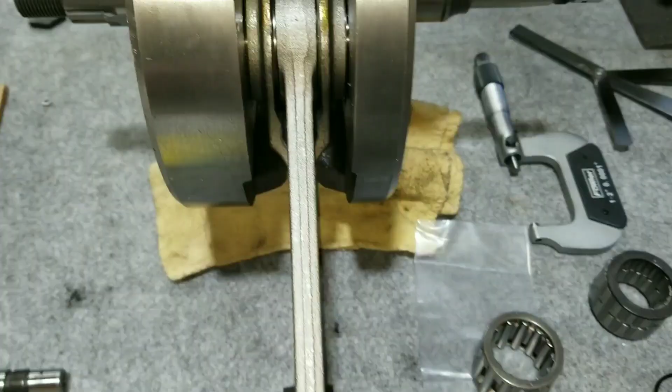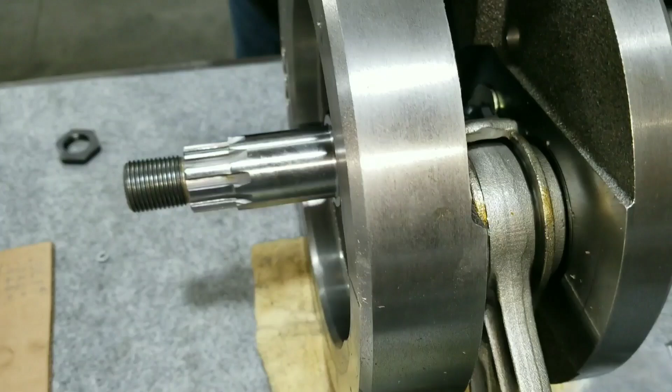Straightforward, this flywheel is a reproduction from V-Twin because I didn't have a flywheel for the 56, and it needed a 58, if you remember right, to make this work with the right side case. So this is a 10-1008 flywheel. It's for 58 to 64 engines, because 65 of course is electric start and stuff. The sprocket shaft changed. This is sprocket shaft side, this is pinion gear side.

Now we fit the bearings earlier into these. We got them to fit really nice. They just went right on and everything in the last video.

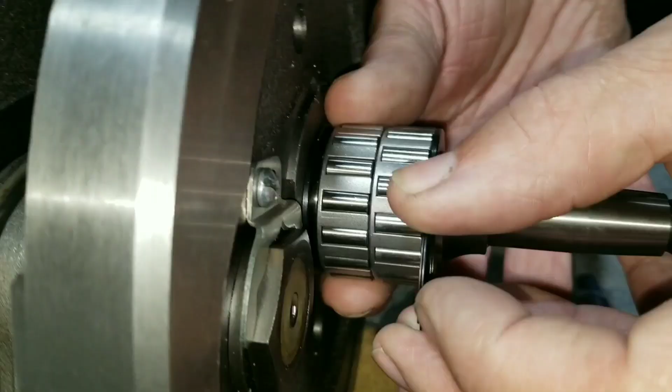But we're coming up with a problem here when we go to mess with the crankshaft, because we used this to fit it with, and this is a good shaft, and this is how you do it. You use one of these extra shafts laying around and fit the bearings, but this isn't attached to a flywheel. So we've got the bearings sitting here on the flywheel, and we come across a problem here with this reproduction: way too much clearance, and it'll fall down into that groove.

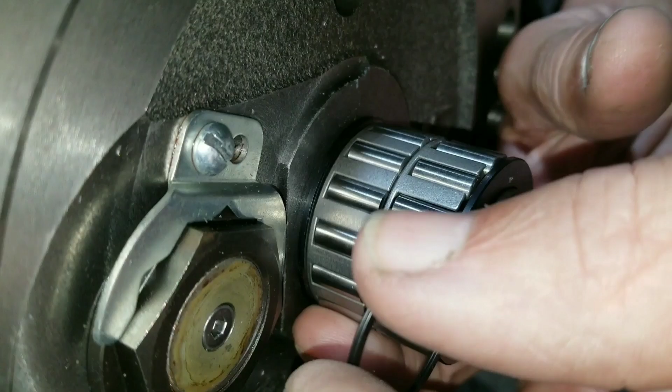See there? Maybe not really. Oh yeah, yep, I've seen you do that. But yeah, what's happening is there's too much clearance, like you said, and then we can't keep this tight with the retaining ring in. Look at that distance between the retaining groove and this. It's almost thick enough for another one of these.

Almost. And there's no special instructions with these flywheels when you get them from V-Twin. And when you go to message them or ask them a question, unless you're an actual dealer in parts, they won't talk to you. So we're kind of trying to figure out what to do here. They don't tell you to use a special bearing with these flywheels or anything, so we got to figure this out.

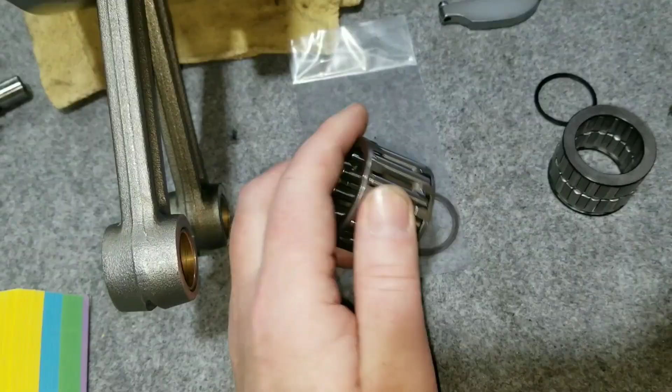And I think we have. What we got here is a different bearing, a V-Twin bearing, and it's a dash 58 bearing, and it talks about how it's for all them too. But didn't it come out like 73 or something? Yeah, something like that, I think this is a 73 bearing. And these changed throughout the years — 73 they changed, 81 they changed.

These bearing sets go all the way to 86, but they changed bearings throughout the years. So using this V-Twin bearing, we slide it on there. We don't put one of these in the back — don't need one. You don't need one in the back, but we put one in the front like we need it, and there it lines right up with our retaining ring groove.

Yeah, and we still have some play. And that's what we need. Now we just recently took this extra shaft and used it with that bearing, and we had the same free play on our right... well, we can't hear because I got a piece of wire in there. But anyways, yeah, that's because that gap ain't there. Right.

So the funny thing about that gap, and we saw this before, because when I got this bike it was all in parts. The motor was, of course. We saw that in the very, very beginning when we talked about this bike. The bike was all torn apart.

It came with flywheels. They had a set of flywheels with it, but we find out they're 80 — yeah, 80-inch flywheels. So they were going to make a stroker out of this motor, the original person. I'll show you them here in a second.

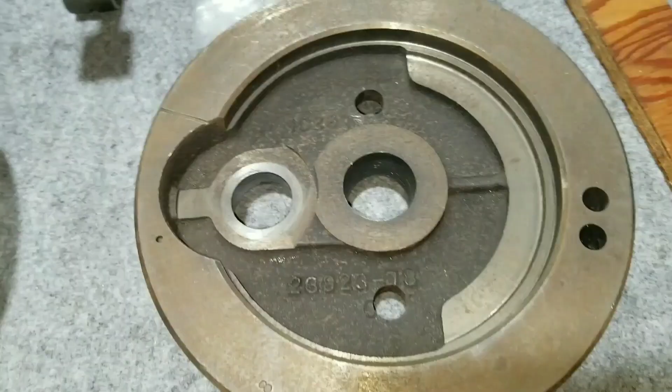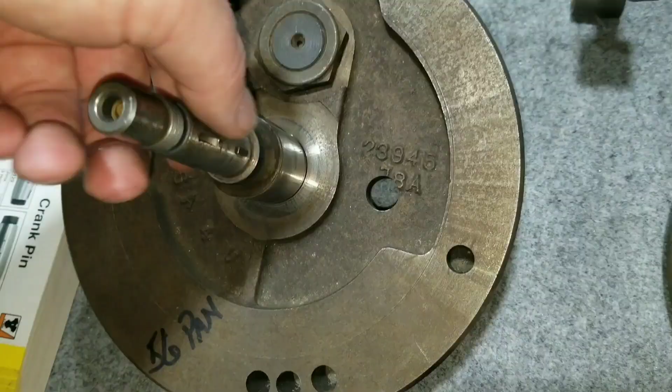So these are the flywheels that came with the engine when I got this bike. And here you can see it has a dash 78. We measured it — it has a 4, and it comes out to this distance here, ending up making it a 4 1/4 stroke. So this would be the 80-inch flywheels, which would have been neat to have an 80-inch pan head. But then here's that shaft — this shaft goes all the way to 74 and so on. But you know what's interesting is that this has that gap too.

So it takes a special bearing. Well, we found out what the special bearing is, and it happens to be this one, but no one ever says anything anywhere. That's the same way.

And even the parts book still shows these all the way through the '74. They show this style bearing using two of those thrust washers and then the retaining ring. So I'm not here to tell you how to fix it, but I'm telling you how we're going to fix our situation to make ours work.

Going forward here, we're going to install this bearing and run it that way. But first off, we've got to press in the Timken bearing on this side and spacer.

I think I covered most of that. Maybe I'll mention something else here if I think of it. Yeah, it's a little bit more here on this flywheel assembly from V-Twin. It does have an S mark on it, meaning Sifton. But in the old days, Sifton didn't really make a bunch of these parts, so it's kind of a well-known name on this. But the other thing I noticed about it was it has the -74 rods,

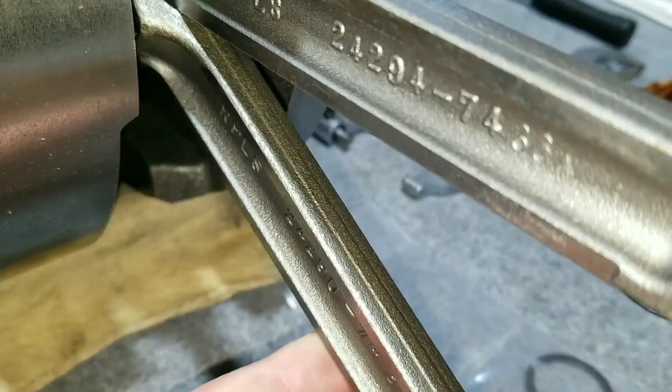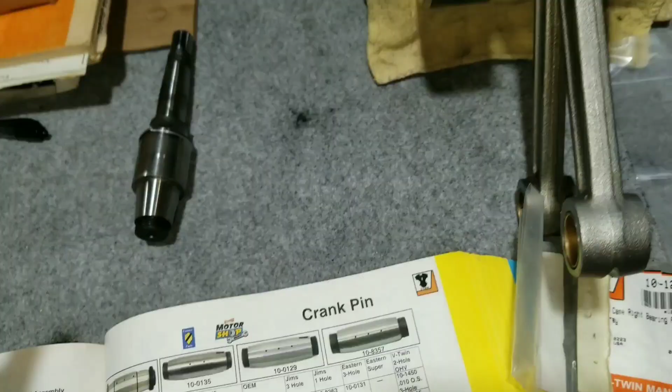which in the V-Twin book, it does talk about how that part number comes out to be 74-inch pans, 74 and 80. It's the same length. It's just that you're moving the pin out farther and back. You're not getting your stroke out of the longer rod. That's what I'm trying to say.

And anyway, the other part is this special bearing, which doesn't talk about needing to use this with the flywheel when you buy it or anything. It doesn't say you can't use original style bearings, because we can, because I showed you that.

But the bearing for this here is 10-1274, and it should end up just like that. So if you're having problems with having that gap like we're having, go that route, and that'll be the way to do it. Don't do anything crazy like leave it out or leave it like that, because it'll flop back and forth, and then this thing will fall inside there. It won't sit true and straight, and then you have a problem.

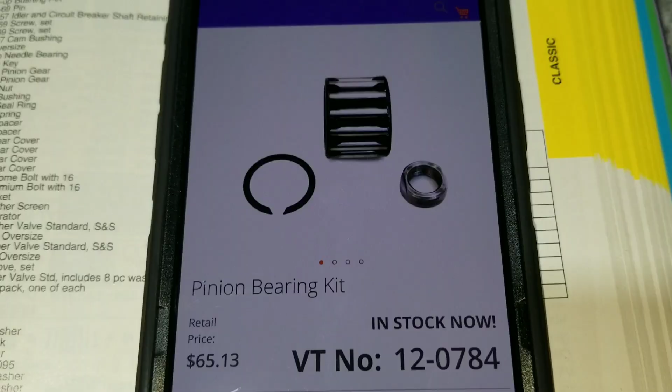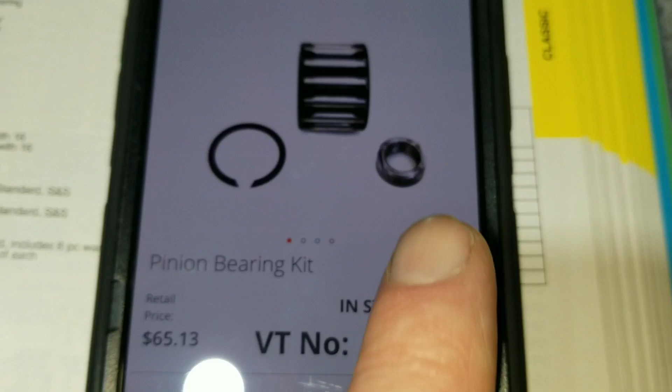So just to clarify on this bearing that we're going with, I just want to mention that this is the part number I ordered, 12-0784. Bearing kit. It comes with the retaining ring and then a new nut on the end. I didn't really need a new nut, but it was kind of a nice way to get that set.

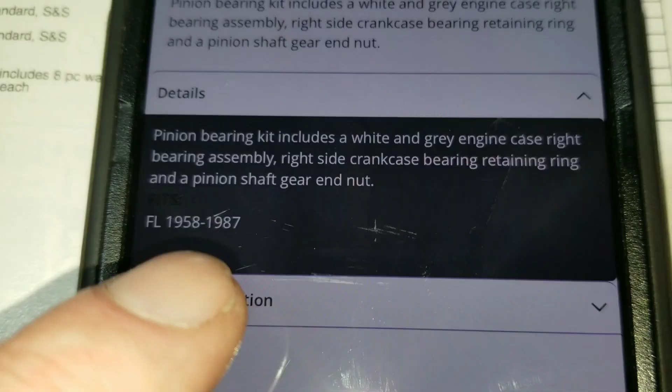But when I opened the package up when I got it, this was what the bearing was sitting inside of. So in the description for this, it says '58 to '87, and of course this is the '87 and later bearing, like it says here. But it is able to interchange.

So, I mean, it's just kind of crazy. I just want to clarify that a little bit more, because I rattled off this part number, which you can just directly go right to this and get it and avoid these other parts here. So, yeah, you can avoid these other parts just by getting that, and you can do that by just going with this number.

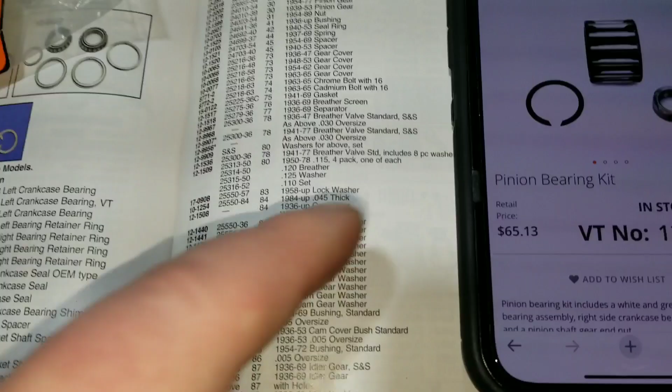But the number for the kit is this one here. It comes with that bearing. And you can probably find it in this book too, but on their website, because this is their website, V-Twin's website. Just gotta find a dealer that sells this stuff. So hopefully that clears that up just a little bit more.

So on this V-Twin flywheel, it kind of irritates me about the whole thing, and probably other people have run into the same problem that I'm running into. It's obvious, because they're probably all like this. But that gap, I was thinking that there was totally a problem with this flywheel, and if V-Twin would have just come out and said, hey, you've got to use this bearing assembly with this flywheel, that would've been okay. I mean, it would help out a lot of people.

And because when you get a '58 replica flywheel like it states, you'd think that you could use all your '58 stuff for it. So I ended up buying those cages and all those bearings for kind of no reason, because all I needed was this. And when we go to check this, like I was saying, it does fit in the right side case, same clearance and everything. In fact, it might even be spot on to the same. I mean, it looks crazy because it's different.

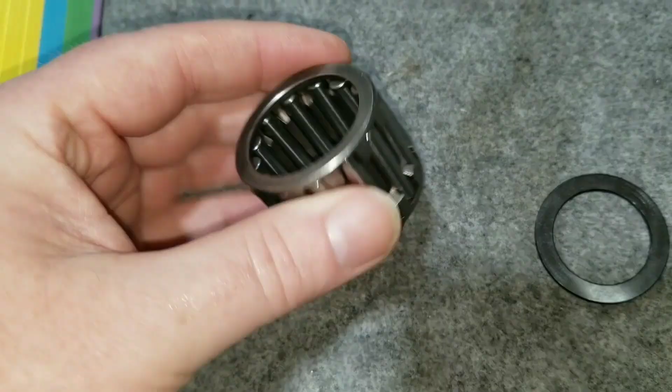The benefit, maybe from this, they went to this style in 1987. But you put an '87 part in a '58 part together, it just doesn't quite logically make sense, because the fact is they're two different eras of time, have different engines. I mean, '87 was the start of the Evolution engine, but yet it still carried on.

And when we were putting that right case or race in, the right side race in, it goes all the way up to '86 anyway. So I mean, it's kind of funny how that works out.

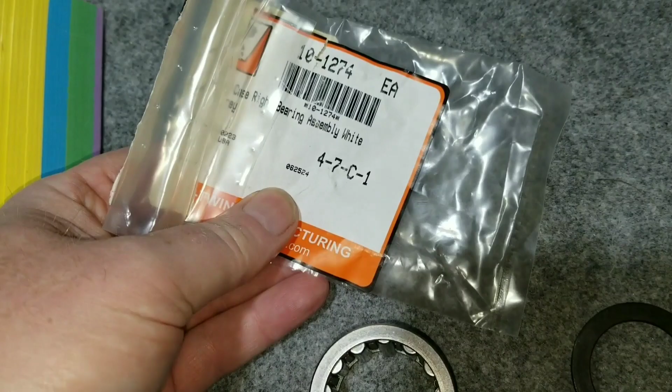Looking back at this, this is the V-twin part number, 10-1274, and when you flip it over, it's got the Eastern information on it. It's made by Eastern, just reallocated by these guys. It says new style, one piece, white and gray, big twin, 87 and present, 24625-80 or 626-87A.

It ain't gonna be a big deal running this bearing in there. Like I said, it's got a full length roller, going across the whole section instead of having all these different rollers. Other than that, you've got your thrust washer spacer. No big deal, I'd have to actually look at an 87 book and an 87 to 99 book to see what that looks like. I have a parts book for a Softail over here, maybe I'll look at that real quick and see what it looks like in the print.

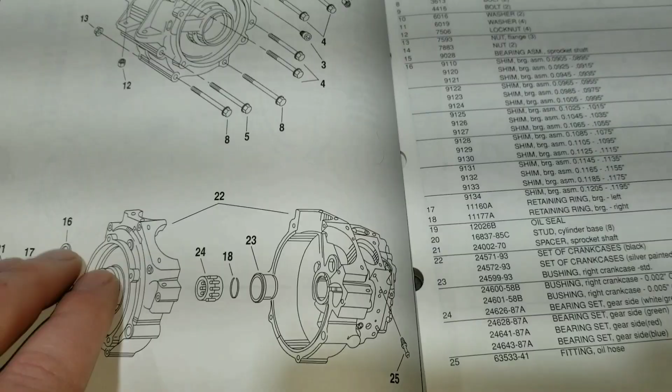Alright, this is a 99 Softail book, Evolution engine, and there's our bearing, our race, and then the keeper. It doesn't show that spacer, which we're going to need for the 58 flywheel. Over here we've got 24, 18, and 23. Okay, so 24, there it is.

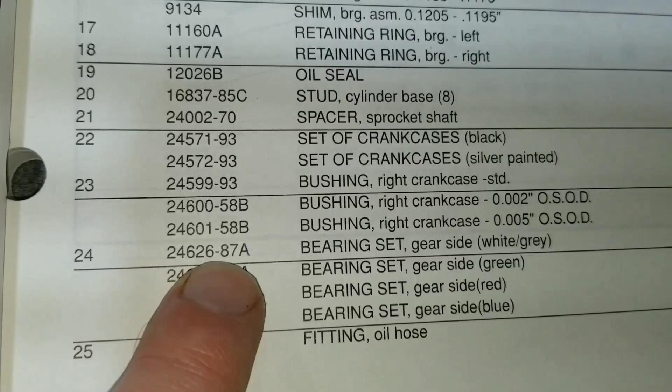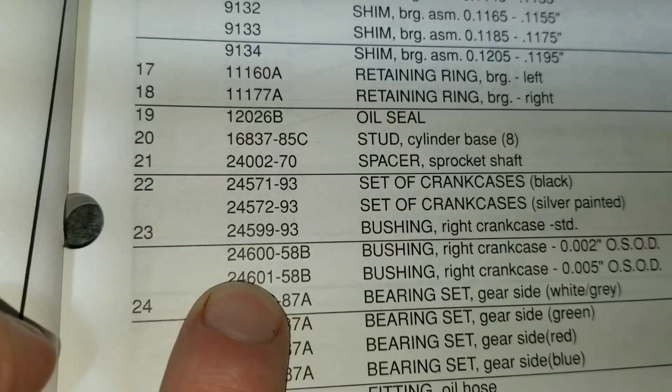24626-87A, white and gray, meaning standard, and then it goes to oversized in different colors. 23, there's the race we put in, 24600-58B, I believe that was what it was. No, that was the oversized one. Okay, so that's the oversized one, and I guess they changed it to the standard one being a -93 here. So we put the 58B, but it was a different part number in the front there in the case. It was a standard size one. And then of course the snap ring, or the retaining ring.

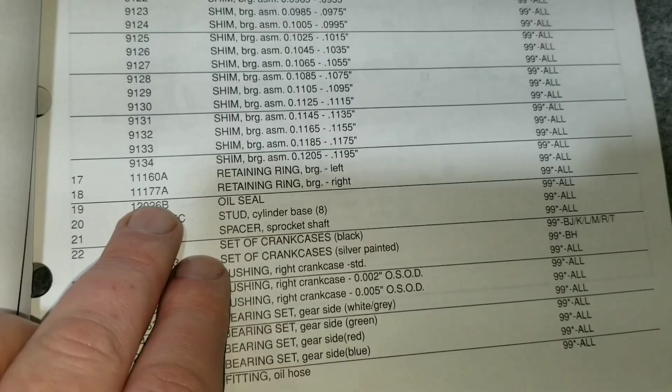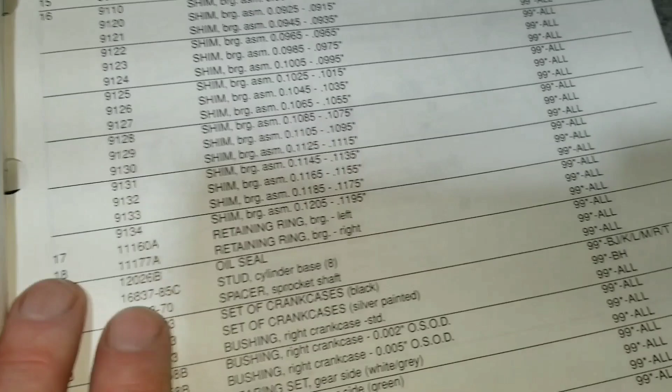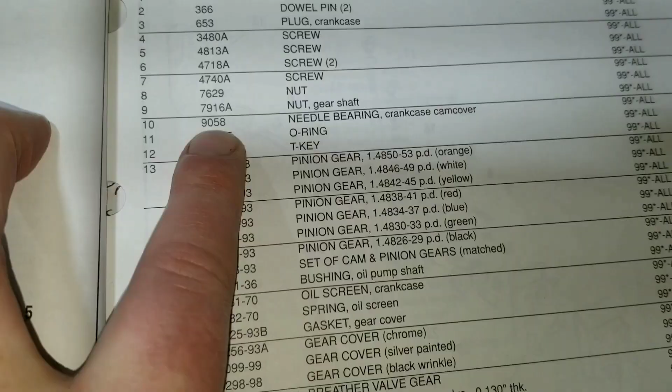But there's still a lot of similarities going on here in this engine compared to the panhead that we're working on. Like the left side bearing here, it's real similar. It's a 90-28 though, they changed it a little bit from 65 on and so on. Cam side, they got this bearing here, it's the 90-58, which starts in 58 and goes all the way to 99 here. It's kind of cool how these parts lasted as long as they did. They worked good, so they left them.

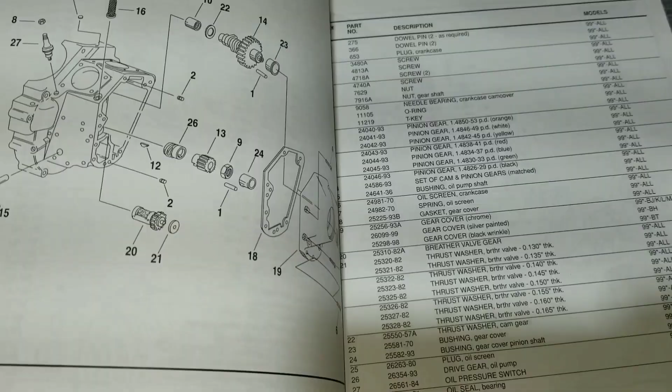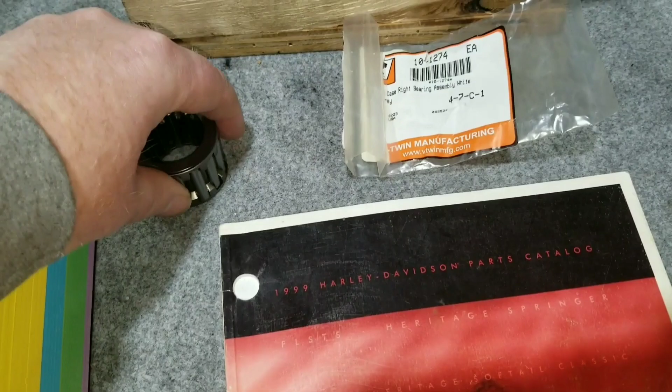And then in 2000, of course, it changed for the Softails anyway, when it went to the twin cam. 99 got the twin cam, and all the Dyna models and the FLHs. But anyways, that's a whole different story and ball game. So just trying to clear up some stuff here on the 58. Hopefully it all makes sense, and then we're just gonna go ahead and keep moving forward here on getting this flywheel going.

Before we flip it over and start working on the left side, I want to pay attention to this right here. A lot of these gear side pinions have a hole here for the oil travel gallery, and we want to make sure we install the set screw that belongs in there. We need to not just leave it like it came from the factory, we need to actually use Loctite and seal it tight, because you do not want this to leak. If this leaks, you'll have no oil pressure, because the oil's coming through here and out this hole. If it goes out that hole too, it just dumps into the cam cover. So we're gonna install that now.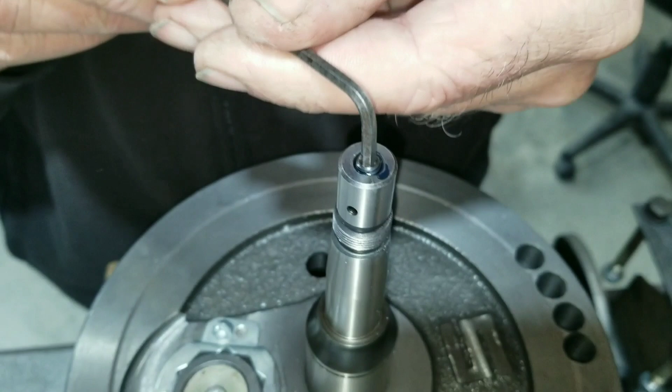Here's some blue Loctite. Put it in as tight as we can get it, because it will stop before it gets to this hole here. We brake cleaned it first.

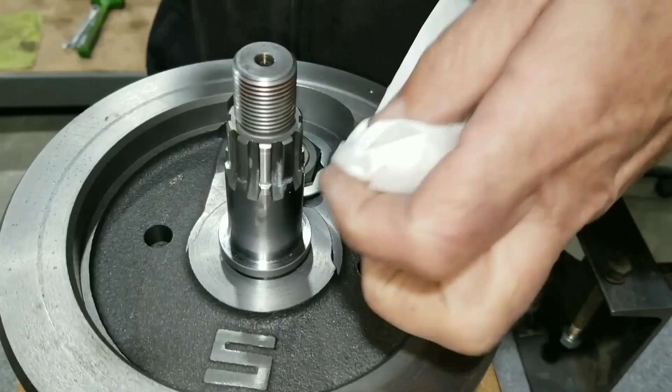Now we're ready to move on to the left side. Alright, so we got this flipped over and we have it on the left side now, up, ready to start working on installing the bearing here.

We did have this thing checked for trueness on a truing stand, and it comes out pretty good. This ended up having a little bit under 1/1000th, and the other side is 0.5, so it's really true - really parallel. It's really close. This part to here, the runout is good, and then of course the two halves are good, and the other side.

We had that done, not really locally, but at a well-known place - local, close to us anyway. So anyways, we're gonna move on to installing the bearing now, because now we know for sure that this new product is good to go and should not have a problem when we get to the end here on runout. Assembly runout, that's what we're looking for.

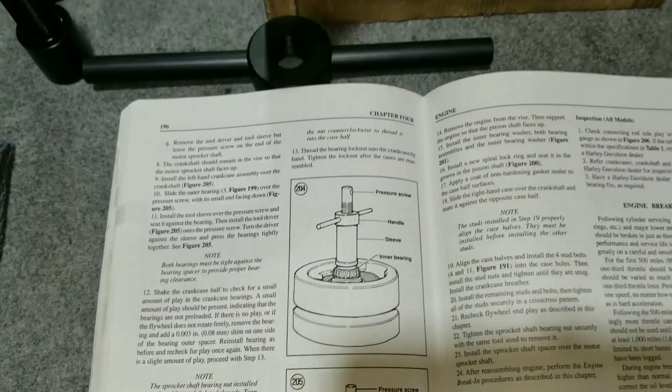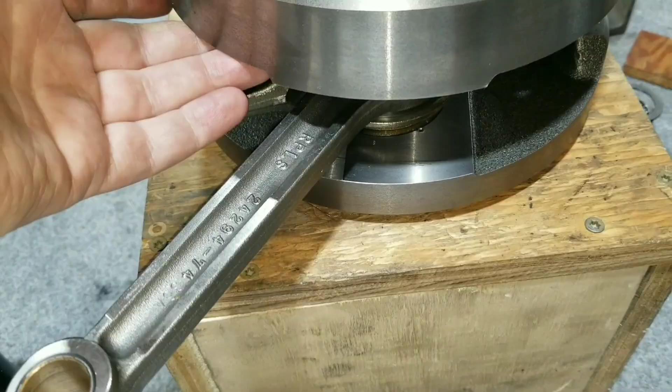Here we go. We're gonna get ready to install the bearing into the left side of the flywheel, and we got it sitting up here on our box. We need a special tool to do this because we don't want to damage or mess with the truing of this, because if we bang it on there or press it on there, the flywheel will move, and then the truing won't be proper anymore.

This is a balanced flywheel. I don't know if I talked about that yet, but you can see it has dynamic balancing holes in it. They had to spin it, must have had it with weight, so it has some sort of balance to it. Anyways, here's the tool to install it.

We got the handle. We have this part we got to thread onto the sprocket shaft first, and then we slide the bearing down across it, and then we use this to press the bearing down in. We got two different ones that came with this, depending on how close we get, how much distance we need. We got this nice manual here that talks about the entire procedure, so we're going to kind of go over it without reading it word for word.

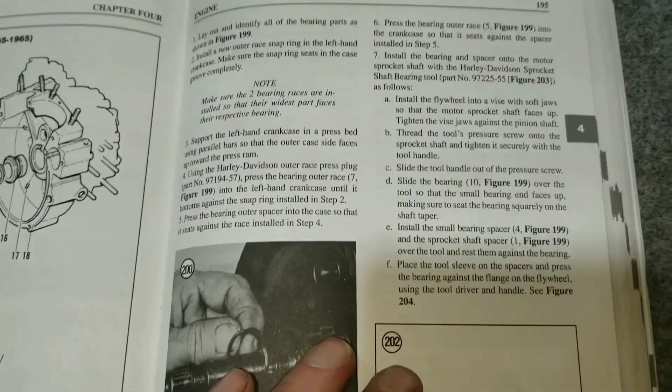Starting off, it talks about how we got to install this onto the sprocket shaft, and we have to tighten it onto there. I can't find my little rod that goes inside here, but this big Phillips screwdriver slides right in there, nice and nice.

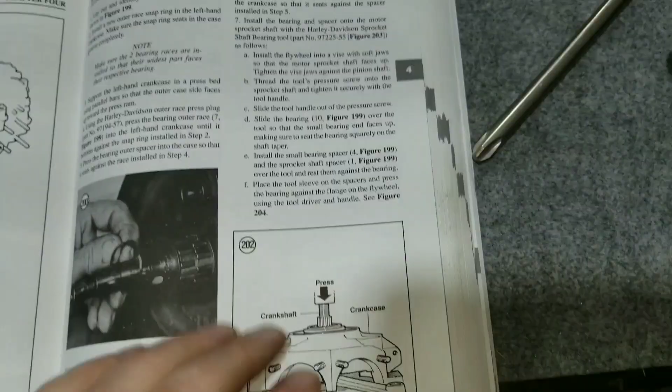Alright, so then it talks about once you do that, slide the bearing over the tool so that the small bearing end faces up, of course, like this, small end up. Wow, just fits. Yeah, it just does. And then I started off all crooked, so then yeah.

Then we slide our special tool down. Okay, put this on it. We could probably... it doesn't talk about that spacer yet. Oh yeah, install this small bearing spacer. And then put that - yeah, so you don't hurt the cage. Oh yeah, the bearing, and then our sleeves.

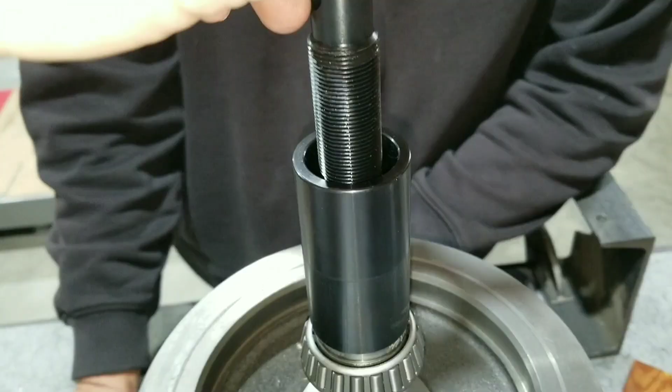And then you either want to put that in there to make the difference, or you just use this and thread it all the way down. Oh, we're going to have to, because there's no threads there. Alright, we're going to get that going, and check out some more steps here.

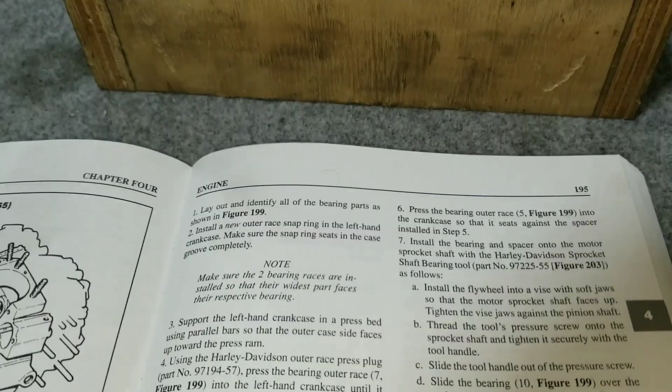Okay, so in the instructions here it says to install the small bearing spacer, number 4, which is that one there, goes between the two Timken tapered roller bearings. Then after that it says the sprocket shaft spacer, number 1, which is the one that goes against this inside this seal here. So we have both of them in there right now.

The bearing is starting to go down. This is starting to engage the taper, and this one's sitting right above it. So we got a long ways to go. We'll get to the point of having this all the way down, cranking on this the entire time, and we'll come back.

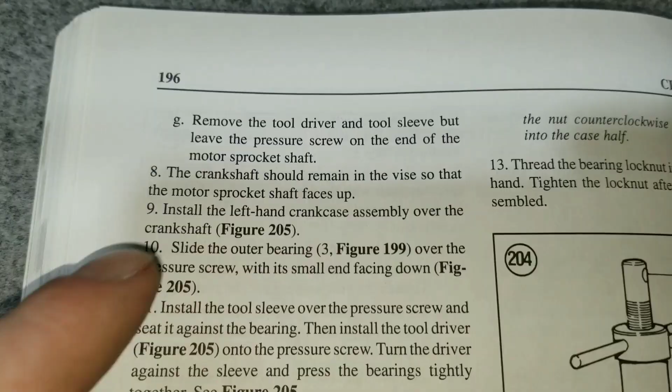Alright, we got it all the way down, and the bearing still moves and stuff, that's great. And then it talks about leaving the flywheel in the vise with soft jaws - this worked out really well, you were able to hold this still while cranking it down. So anyways, it says leave it in the vise.

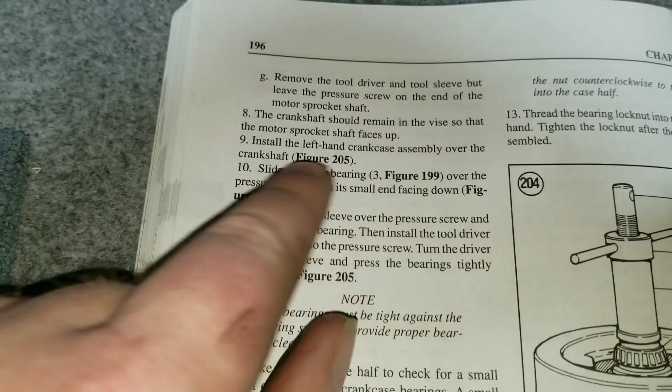Install a left-hand crankcase assembly over the crankshaft and slide the outer bearing, number 3, Figure 199, over the pressure screw with its small end facing down. So we're going to be putting this bearing in next, and so on.

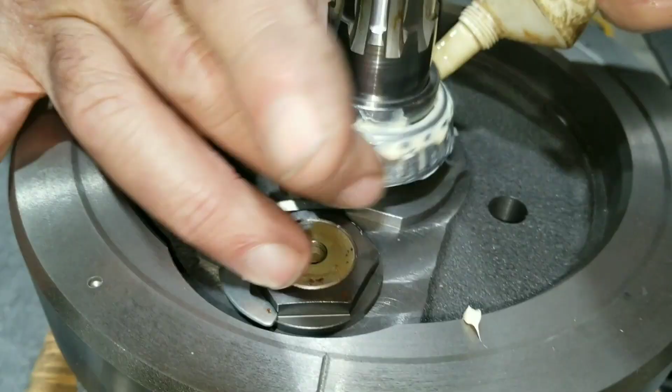This all dissolves in oil. Yeah, but we want something in there before we want to be back in there, so yeah, we want something there for a pre-lube. Where's the other bearing? It's right here.

Okay, put that back in there. Install the left hand crankcase assembly over the crankshaft.

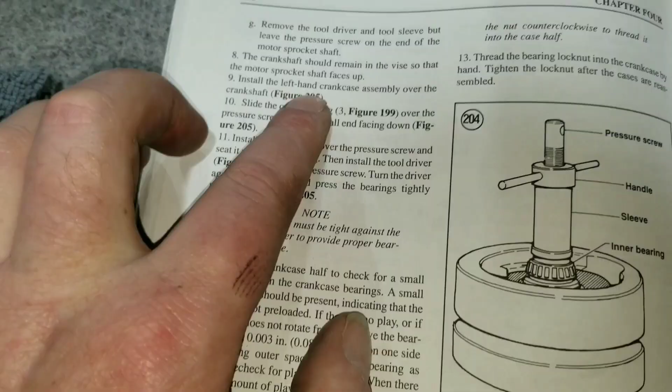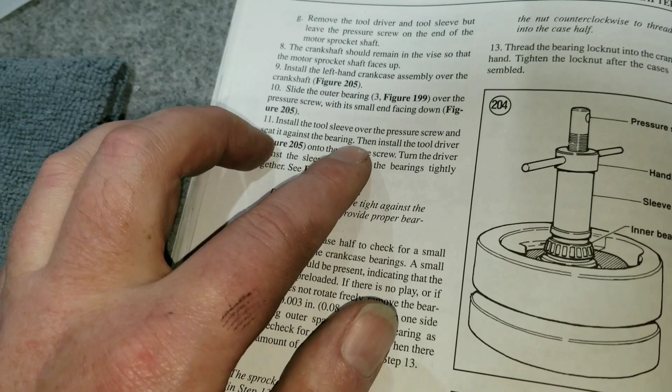Slide the outer bearing over the pressure screw with its small end facing down. Install the tool sleeve over the pressure screw and seat it against the bearing. Then install the tool driver onto the pressure screw and turn the driver against the sleeve and press the bearings tightly together, just like this.

Okay, let's go. Alright, so we got the spacer in between the two bearings. Now we got to get this square. Put that square, and then we're going to start our process here.

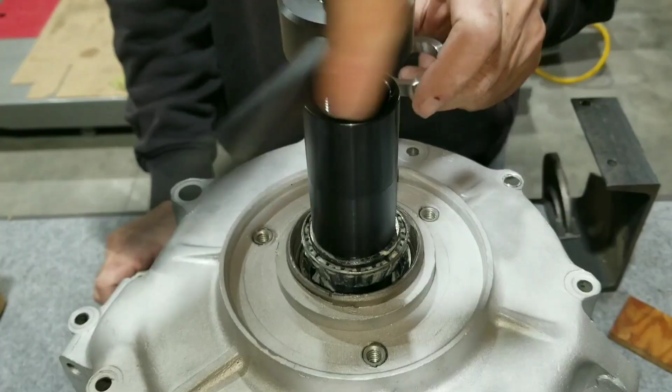Yeah, I think you're supposed to put this on there too, aren't you? Oh yeah, so it doesn't damage the bearing when we go to press it in.

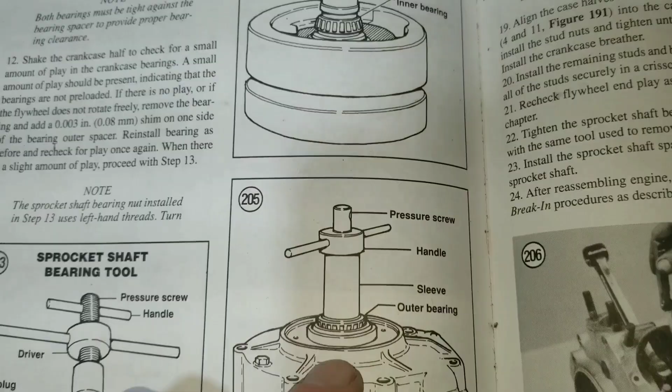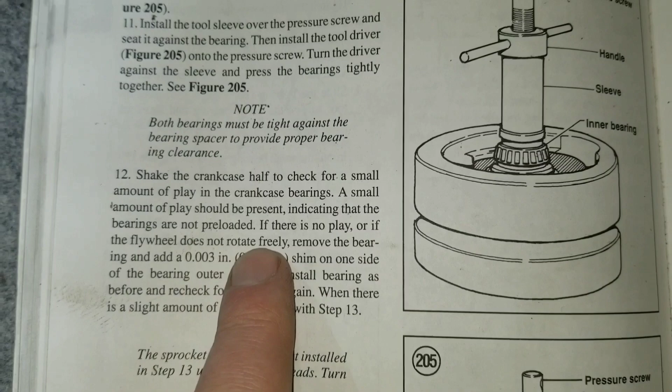Alright, we just got the left crankcase assembled here, and we got the bearing pressed in with our special tool. It says here in section 12: shake the crankcase half to check for a small amount of end play, or play in the crankcase bearings. A small amount of play should be present, indicating that the bearings are not preloaded. If there is no play, or if the flywheel does not rotate freely, remove the bearing and start over by putting a 003 shim in.

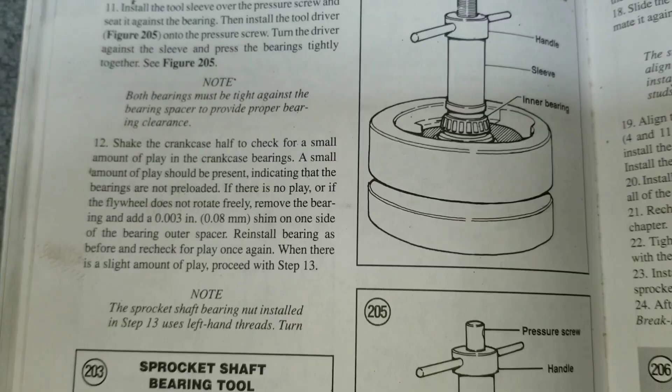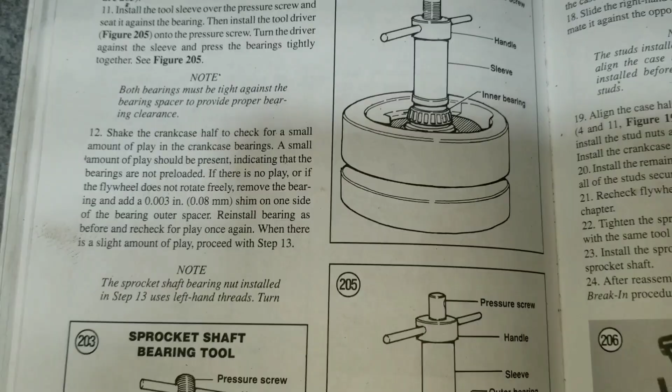Well, this special Timken bearing set is actually a precision machine set from Timken, and it has all that stuff figured into it. So the spacer that goes between the two tapered roller bearings, it's all figured out. You usually don't have to worry about putting this in unless you have some wear or something. And anyways, because you want the tapered roller bearing to be on its race very nice and straight.

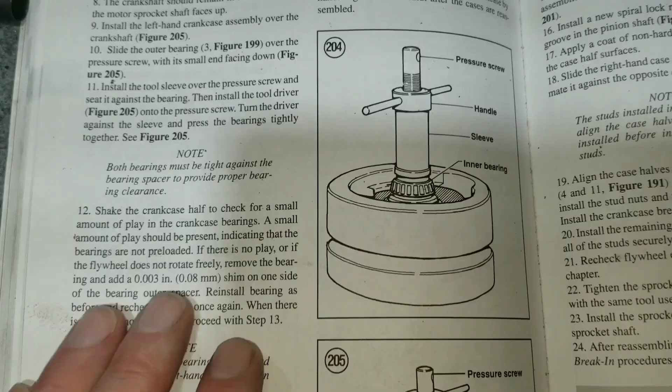You don't want any sort of slop. So if it rotates, then you know you have clearance. If it doesn't rotate, you have bind. And this will open up when it gets warm anyway. Things will grow. So just want to talk about that.

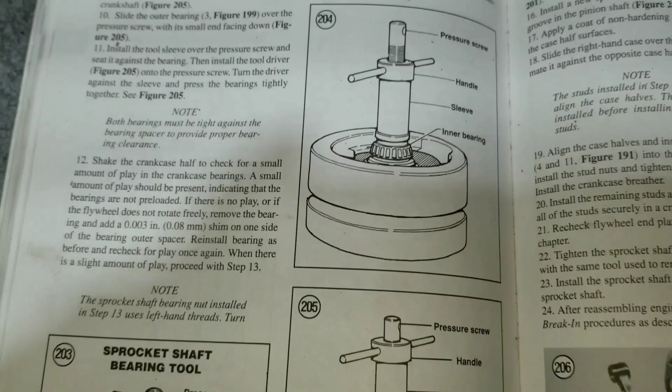So we have good rotation, and we're ready to go on to some more stuff here with getting it all together. We're ready to install this retaining seal here.

It has a lip. We have it oiled already, so it's gonna be nice and fresh oil going there on that seal. There's a special tool to install this too.

It takes something like this. This is made by Colony. It's kind of nice. It's backwards threads. Yeah, I think that's what it was, left. Then this works with both aftermarket and standard factory retainers. 2318-1 special tool.

There it is. All right, we'll check all this stuff later, as when we do have the engine halves brought together, which is coming up next. I think we'll be able to do that now.

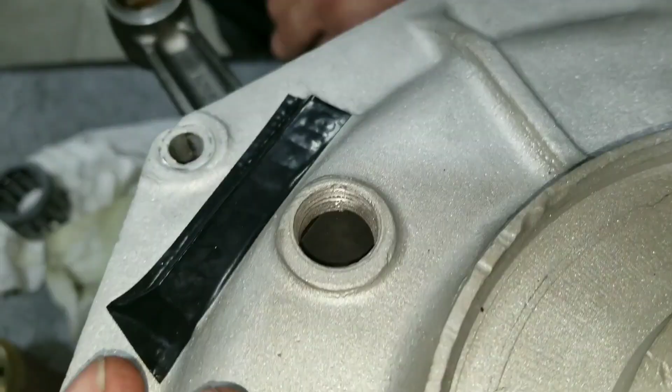There we are. This part of the case is all assembled and ready to go together now, and we did check to see if we have timing marks and stuff, and they're in there somewhere. Yeah, there's one. And there's the other one. That's the one for the timing light.

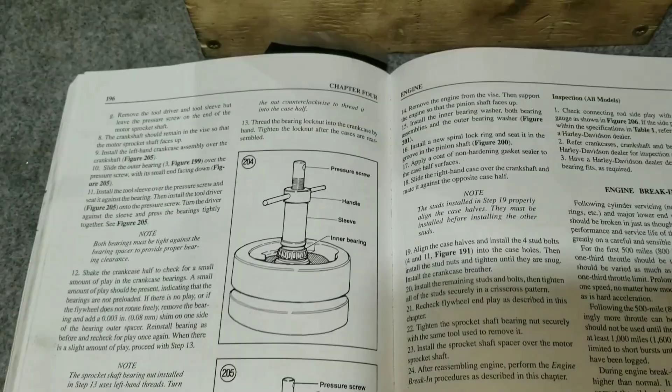So now we're ready to flip it over and install the right side. All right, so going on forward from here, we just got done pressing the bearing down and stuff, and we got the left case on there and all tightened down.

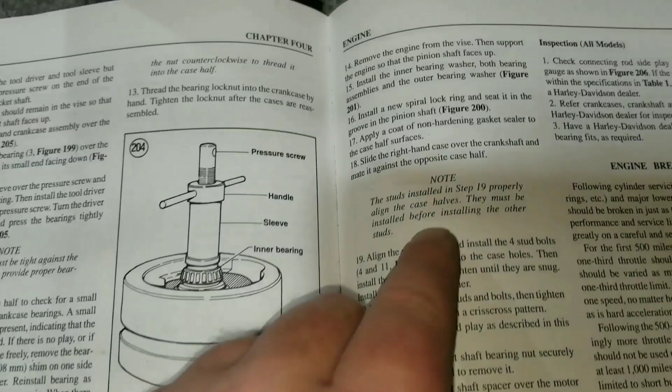Going on with the steps here, we have: remove the engine from the vise, then support the engine so that the pinion shaft faces up, and we're ready to do that. Install the inner bearing washer, both bearing assemblies, and then we're ready to put all the right side stuff in and put the other half on.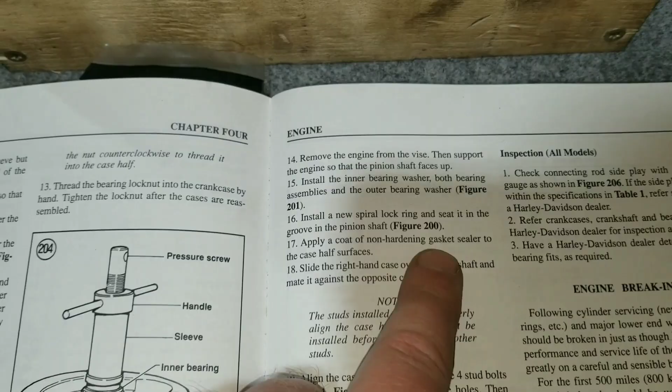It then goes on: install the new lock ring, which we're doing anyway, and then apply a coat of non-hardening gasket sealer. We're not going to do that yet because we might have to take this apart again when we work on the right side.

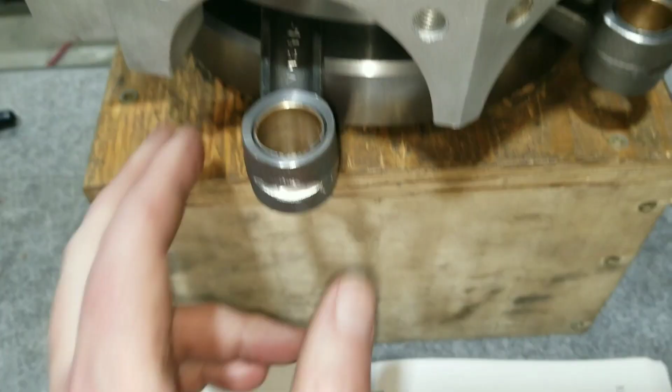We're going to end up having to maybe, this is the new flywheel like we talked about, and the cam cover is a used one, of course, and the bushing may need to be replaced. So we'll find that out in the next, maybe the next video, because we won't get that far here. So let's go ahead and flip it over and then get the right hand side all together.

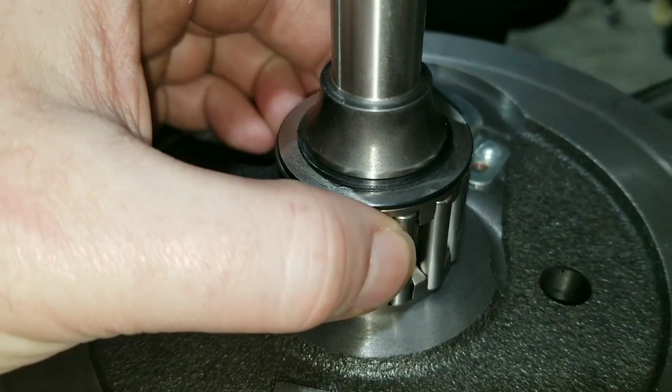All right, so we have the bearing installed here. We talked about this earlier. This is the style bearing we're going with. We have the thrust washer there, and then the snap ring installed there. And there's good free play there, enough to be right in spec, and it doesn't wiggle and wobble around.

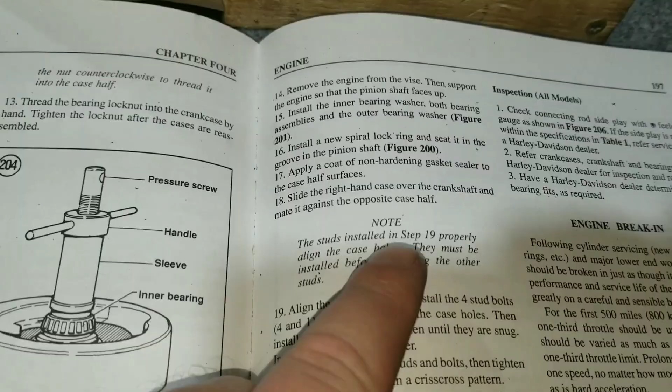And then the next part here, there's a note. It talks about alignment studs. The studs installed in step 19 properly align the case halves. They must be installed before installing the other studs. We talked about this before, alignment studs, but we're going to put some emphasis on it.

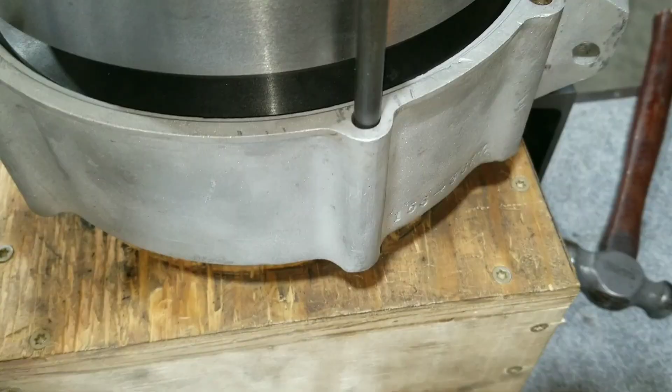So an actual alignment stud is a stud that goes in these bottom two ones here, and it goes in kind of tight, like so. A non-alignment stud would be like this one here, and it has a lot of free play. So to have the case halves properly aligned, we need to install these three first, and then the top one.

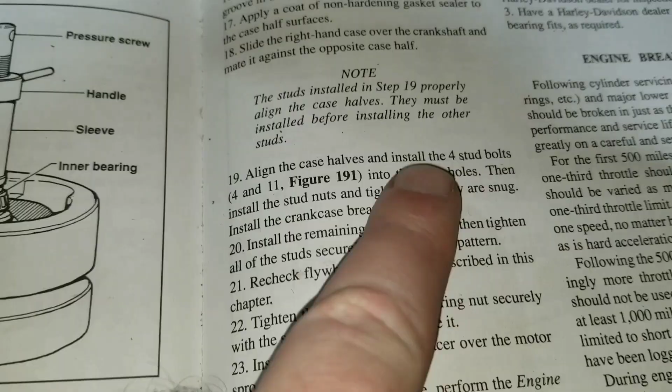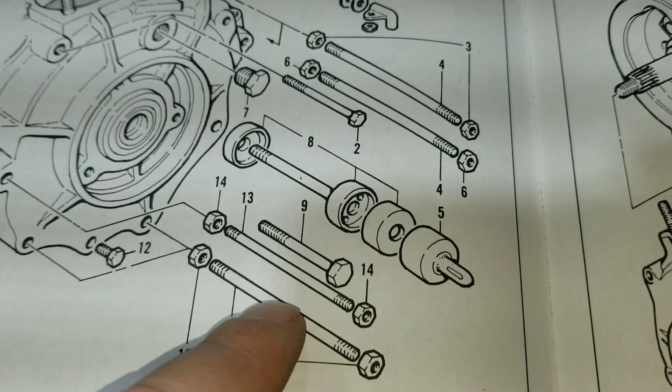And then there's actually another one in this picture here. It talks about the four stud bolts, 4 and 11. So here's the picture. Number 4, we got one going to the top center. And then we have these two going into here and then over to here. So these are alignment studs. They're number 11 there, through here, and then over to there.

So then we get those in, and then we can go from there putting the rest of the studs in. So we're going to do that real quick here. We got the two crankcase halves together here, and we're going to show before we put all the

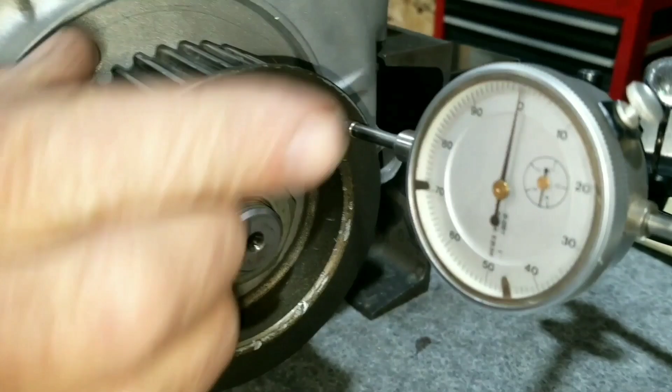other case hardware in, we're going to show you the end play we have here. So you got to make sure that end play is the left and right movement of the crank, the free play. Right now I got it zeroed out. It's all the way back. We got 1.5 thousandths. That's really good.

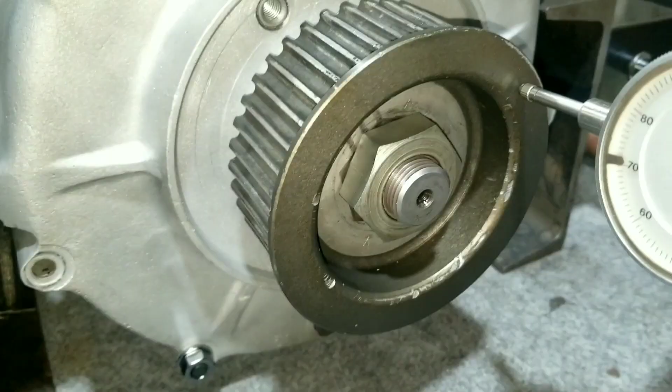All right, let's get finishing up putting all the hardware back in. We got the bottom end here sitting in our stand, and we have all the case bolts all tightened up, and they're even. The studs are well centered in the nuts here. Here's the 57 and older style crankcase breather.

Now, we didn't put the 58 one on. I know this is a 58 later right case, and we should probably use the 58 one, but we want to use this because we're going to be running a belt drive primary, and we want to hook a hose onto this and put a breather or something on there. We don't want the other one, because it looks like a big round circle and you can't do anything with it, and you'd get oil all over the place. So that's why we're doing it this way.

I guess this kind of comes in on this video, getting the crank flywheel assembly into the halves. And I hope you enjoyed everything. The next video we got coming up for this one, we'll continue working on this, and we will put all the gears in the other side and load all this up. The gear chest there, we'll load that up. It depends on how far we get, but building this motor is going to take a little while. So I don't want to have these videos super long, but we're looking pretty good here.

Okay, so finishing up here with this, I just want to show the nice smooth spin of this. And you can see that it's nice and quiet, and it's rotating nice.

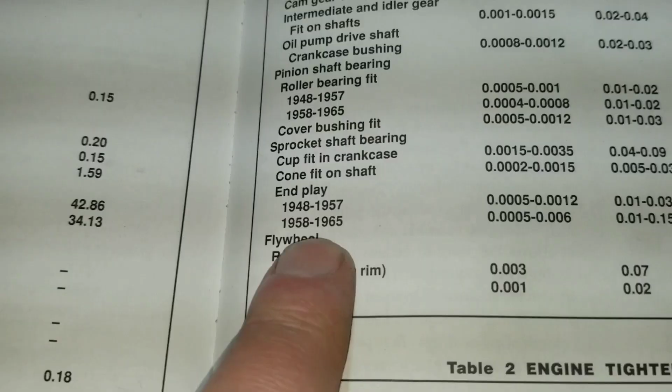And then our end play, that's the other thing, I can move it a little bit. I just showed that in the other section there, and that was like noise. It does make a little, and according to the 58 to 65 flywheel, which we're running, is 0.0005 to 0.006, and we're at 1.5. So we're well within that big window there.

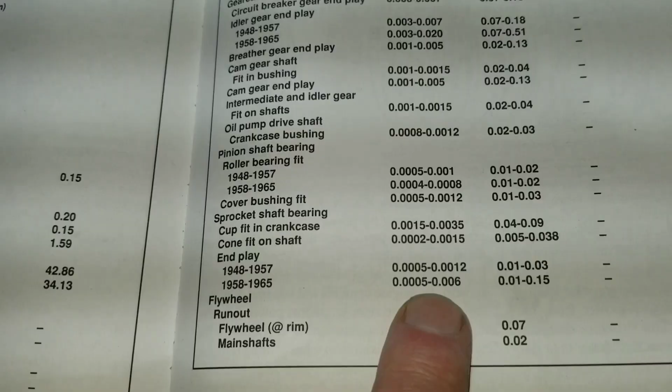So hope you enjoyed everything. I think we're ready to move on to the next segment when we start getting the gears all in here and stuff. What we'll probably do is check the timing cover for the pinion and the camshaft bushings. We're probably going to have to replace that because the cam cover is used and this is all new, so it might not even line up when we try to put it on. So make sure you look out for that video coming up, and we'll see you again soon.